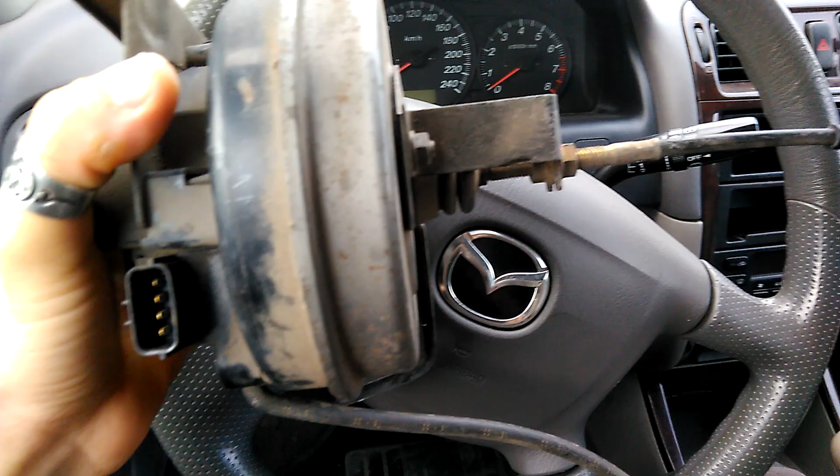Today we talk about installing cruise control on the Mazda. This particular Mazda has a 1.8 liter engine, 74 kilowatts. From what I've searched on the internet, there's no Mazda 1.8 liter FP motor with cruise control - that's just a non-existing configuration. Today I'm going to install one to see if it actually works. I haven't done this before, I don't know, we'll see in the process. It will be a lengthy video, so without further ado, let's go through what you need.

The first thing you need is reading the documentation. By reading it, you'll understand how things connect, what exact wires you need, and how to test them. That's very important. Prior to turning on the car and trying if the cruise control is working, you could test 99% of the cases.

So this is the documentation. I'm not sure I can give you a link to the file, but you see the file name here. I'm sure running it through Google will get you results.

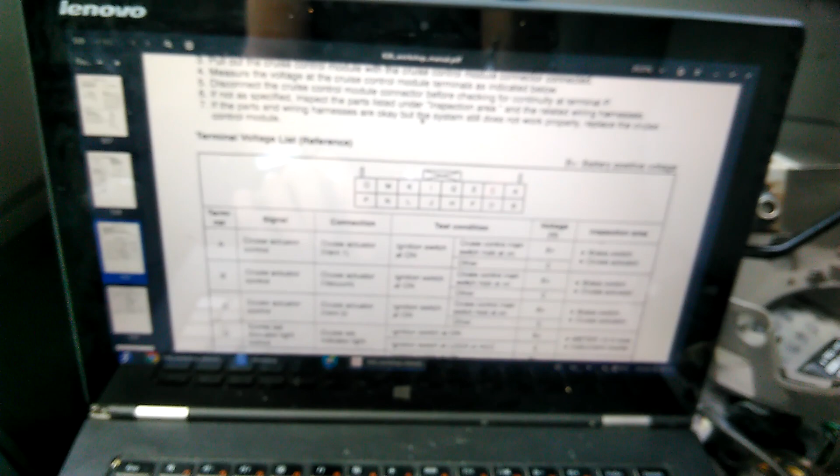So the documentation, this is for the pinout of the cruise control module, the brain of the thing. It shows where things connect for the loom, because most likely you will get the cable loom cut.

Here you can also find useful information when buying. Actually, maybe even here was it.

So when you get the actuator, if someone takes it down for you, you can measure the resistance between the pinouts to check if they are correct before buying.

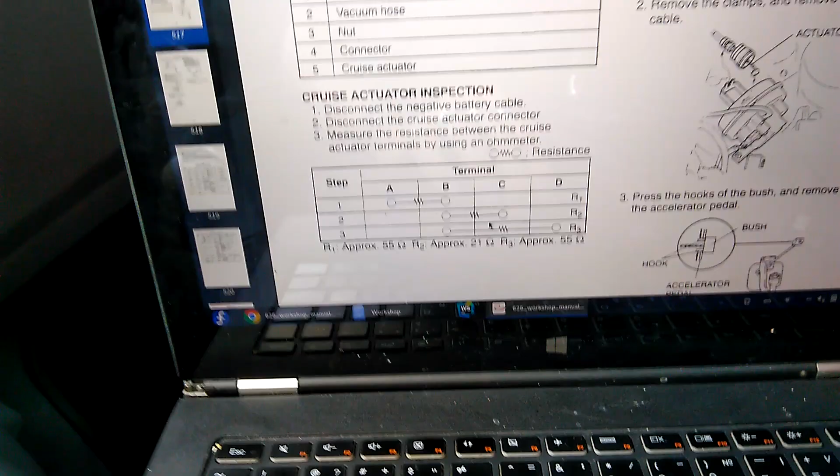Now on my actuator, I actually didn't prepare well. I just went and got everything, and I didn't check anything. On my actuator, between A and B, I actually get 50 ohm, not 55, while the other ones are pretty accurate, 21 and 55. So I'm hoping that's not actually a bad thing. We'll see.

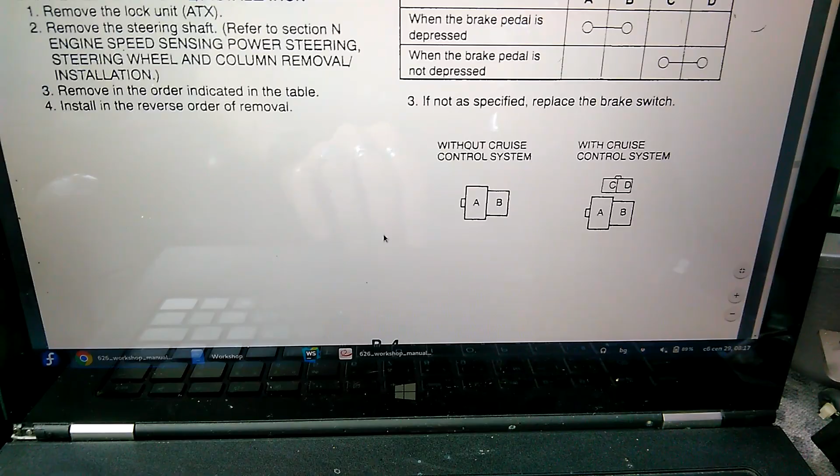The other thing you could check out, and it's very good to check, which in my case again didn't work, is the stop button. That's actually the most important part of the system, because it provides power. As I'm looking through the documentation, it actually provides power to the actuator. If you don't have this, it's not going to work for sure.

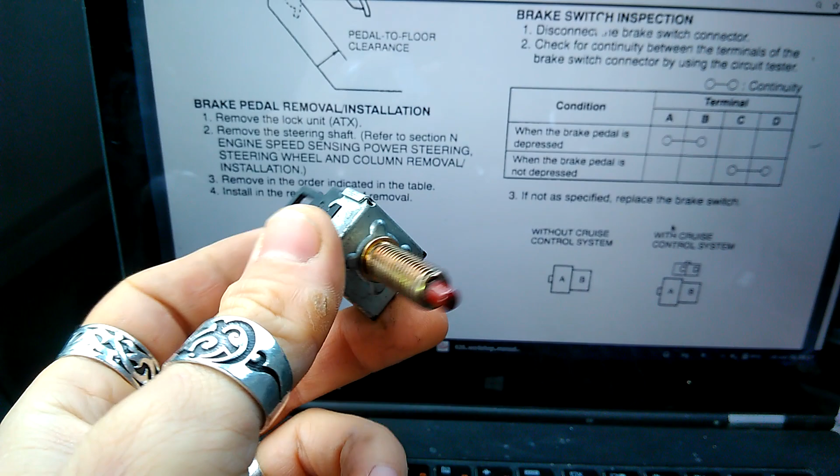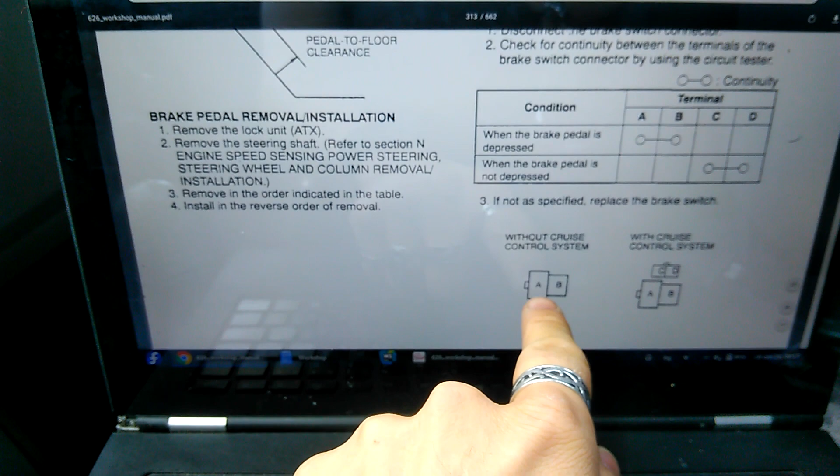At the beginning, when I started extracting parts, I looked under my feet here, under the steering wheel, and I saw that I have a button, but this is the button without the cruise control system. I did not know that they're different, so I gathered all the parts and went away, and a day later I figured out, well, I need this other part, so I had to ask the guy to send it to me.

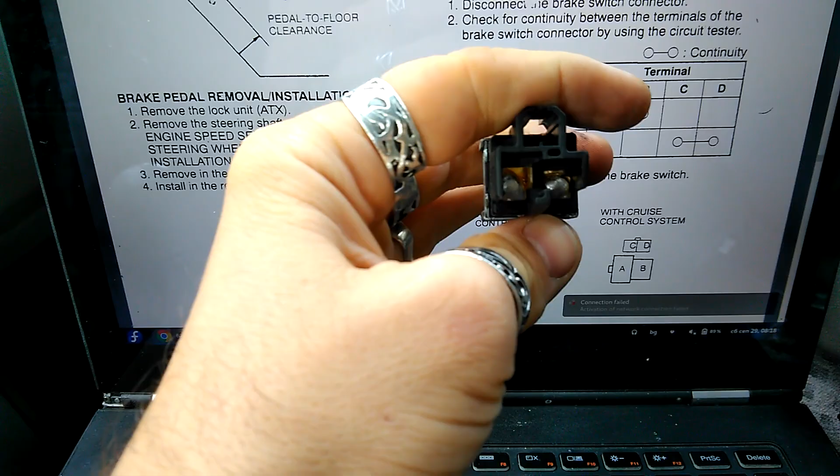I went and picked it up again, and after that, this morning, I did try the continuity test case here, and the C and D, the small one which is additional, the other contacts are exactly the same, but the C and D, there was no contact, so I had to open it.

That's why the label here should say BR70 - the other one doesn't have a BR70, so when buying, make sure this is BR70.

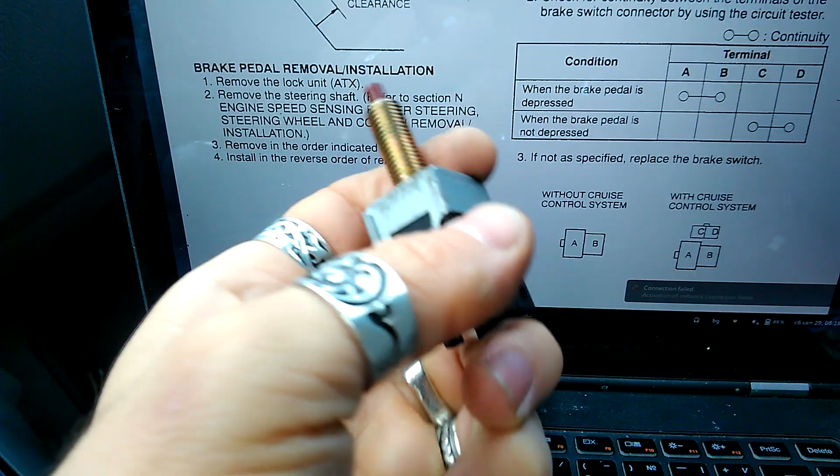I had to open it. You just pop this up and everything comes apart - it's just a switch, just contacts. Either they get dirty, oxidated, or wear out, but you can fix them. In this case, they were just dirty. I scratched on them, and now the button is working perfectly.

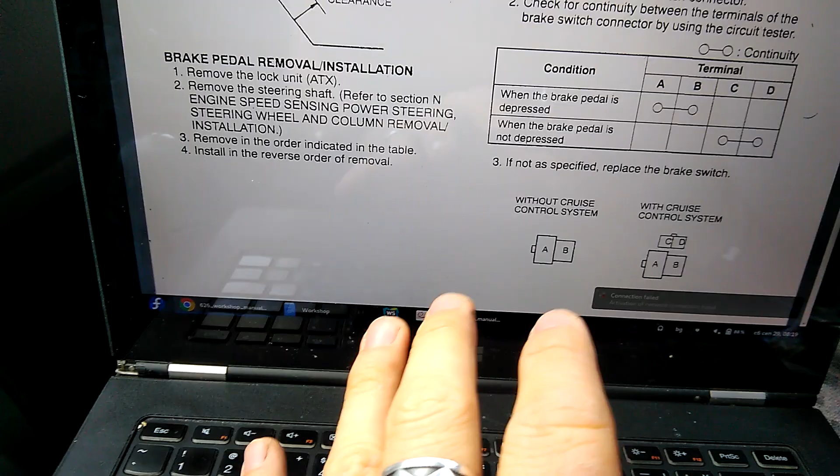Okay, so that's with the documentation - that's how you're going to test. There's even a mode in the documentation for how to enter a testing procedure. This will actually test and blink your cruise control, the green LED - it's actually a light bulb, not an LED. This way you can even test if the wiring for this thing works.

Okay, so enough with this. Let's go through the parts you need. Of course, that's the parts I think I need, but I'm almost sure it's all the parts that are needed.

Of course, the thing that I showed you - that's the cruise control actuator. It goes under the hood. It's pretty big. I have not only this, but with it I have all the mounting elements that are needed.

Then you need the switch, which I haven't tested. Maybe it's a good idea to test.

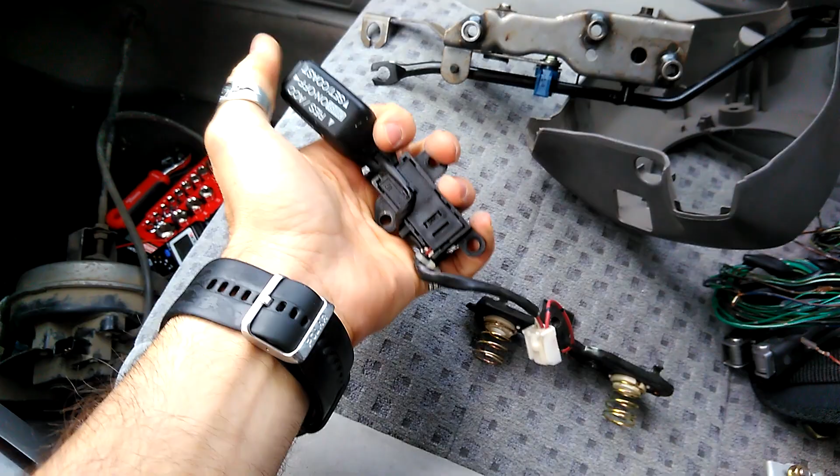There is in the documentation a way to test how it should actually appear when you click something.

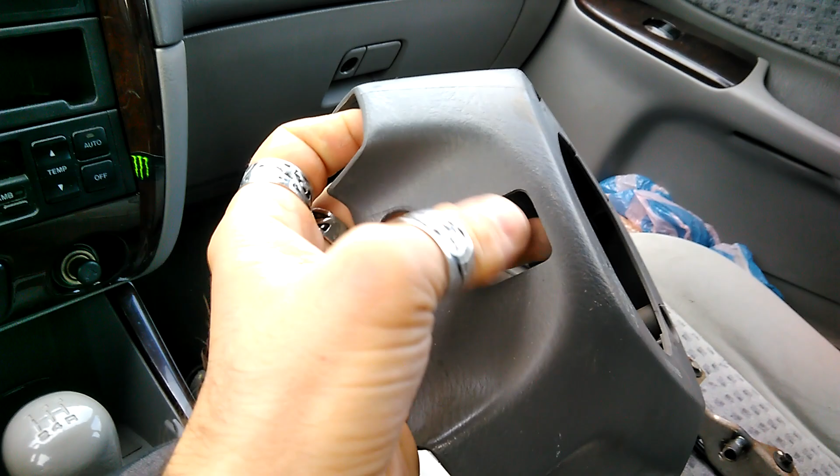This goes into you have to remove the airbag. There are two bolts here, and you remove the airbag. This goes there. For this one you also need this because of this hole here for the switch.

This one, in order to remove, you actually have to pull out the whole steering wheel. So it's good to mark exactly how it was, so when you place it back, it's straight. In this case it's not straight, but I'll mark it anyway, I don't care right now. I'll mark it, and when I place it back, it will be good. Because to remove this plastic here at the back, you actually have to remove the whole thing.

That's that. You need the gas pedal, because the normal gas pedal doesn't have this addition that, when pressed, actually presses your gas pedal. It only has these parts here, but doesn't have this whole thing. And this is where the actuator actually connects to.

Of course you need the brain. This is the brain box, it's positioned here. You need that brain box.

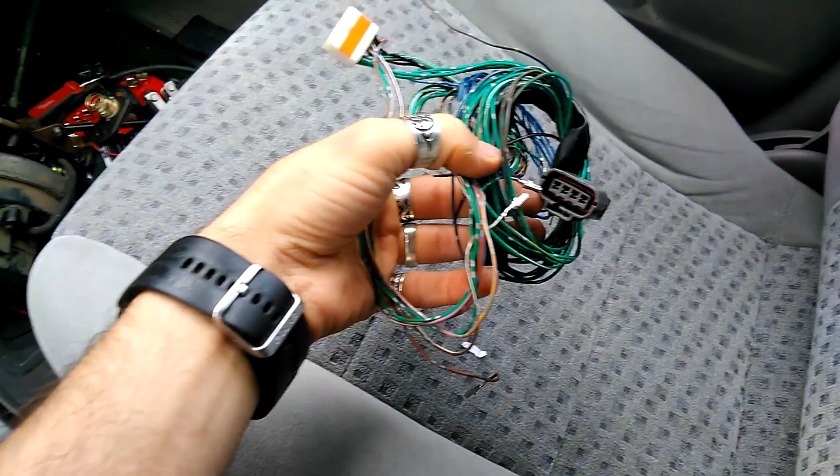I already mentioned this, this is just some tooling. And this is actually the most important part, we have to speak about it a bit more. This one is the most important, because you need to figure out where to connect what.

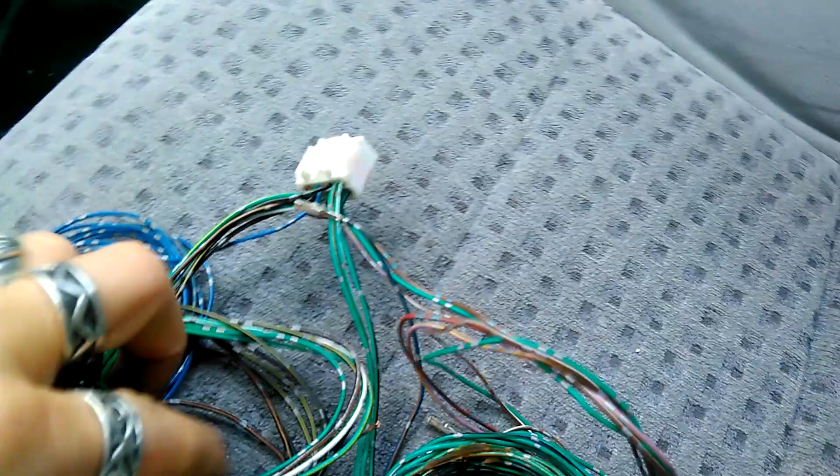If you are lucky enough, like me, to have the car there and disconnect it yourself, as you can see I have a few loops here, different loops for different combinations of stuff. I have the whole cable for the actuator without cutting. I have a few cables here, which I'll tell you about in a bit, which are with connectors. They will go directly here. There is a plug there, we'll talk about that in a bit.

I have a few cut cables. These are for different sensors that the car actually uses, and they're not exclusive like these for the cruise control. And this big wire is actually a test wire.

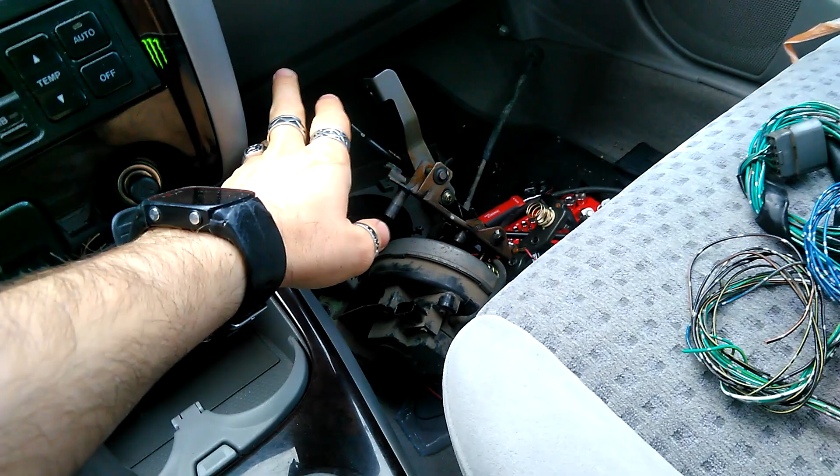This goes into the diagnostics plug under the bonnet. It's not mandatory, I guess, if you don't like it you can skip it. But it goes with these, I'll have to plug those somehow. This is the somehow plug-in, because there is your computer, your PCM or ECU or whatever you call it. Next to it, on top, there is a hole where the whole cable loom goes through.

When we took it apart with the guy who actually owned the car with the cruise control, we thought we'd just pull the cables through this hole. Well, it doesn't work like that. Not only is there rubber, but there is actually a molding. You can see some molding left on the wires. There is a molding for the whole loom, which is that thick, and everything is molded into one big chunk, so no water goes in, because it's right next to your computer. If water goes there, bad things happen. So taking these cables out will be a challenge. We'll see how that goes.

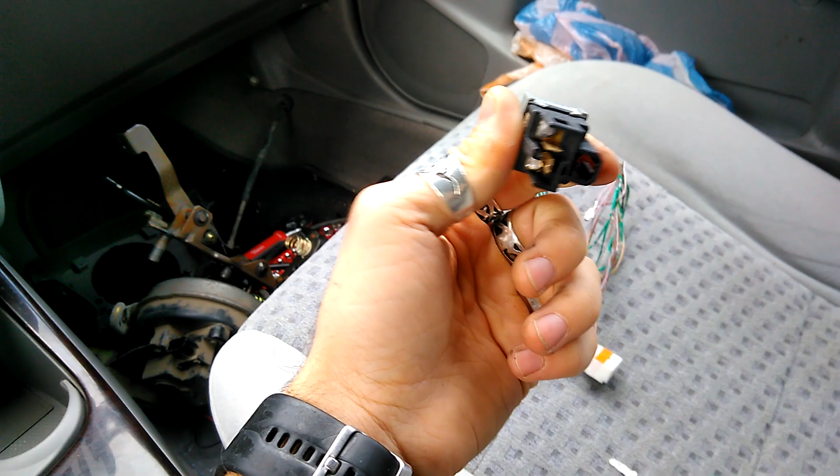So that's actually the second step I'm going to do. The first step in this operation is installing the brake switch, not because it's the easiest thing to do, but because of how you test things. When you install it, all the test procedures are related to this thing, you have to press it and depress it. The second step is to install this thing, because the test procedures require those two things to be installed, so you press stuff and see how the control box reacts, or what things come into this pinout.

So if I'm installing the switch, I also have to install the cover. These things I install first, and for them I'm going to talk about a few things here and now. Let's first start with the brake switch and the steering wheel switch.

Those two switches, apparently, when I first read about them on the internet, I actually found only one guy on drive2.ru, I believe it was called. He had good pictures, he had the cabling of those two already in place. I checked, and well, it's the same here.

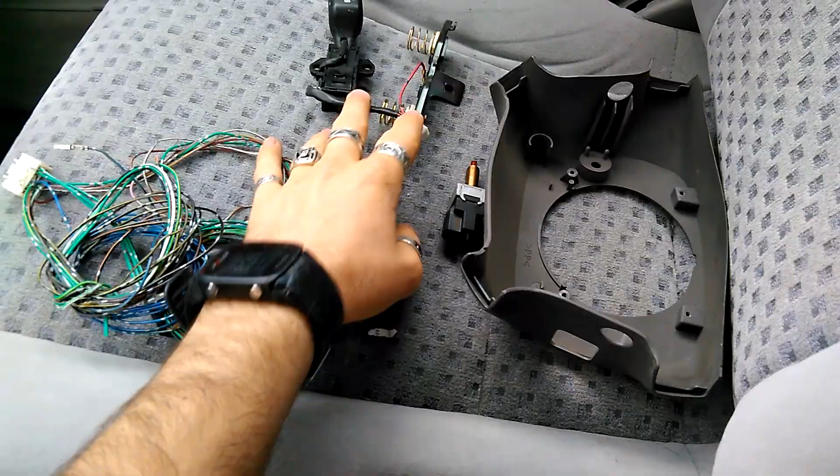So I don't know if you're going to see something. Let me go out. Okay, I'm not sure if it's visible. Let me turn on some flashlight. Interesting, it doesn't allow me to. Damn it.

But here, where is the stop switch? Let me orient myself. You should have an additional loom. Actually, here it is, I don't know if you can see it. This one, that's a connector which is just floating here. There's nothing to it, and that's the connector that should go to the stop switch, the new stop switch. So that's the cable looming for this one, already installed in the car.

Same goes here. I've removed this to check, of course, when I was getting the cruise control.

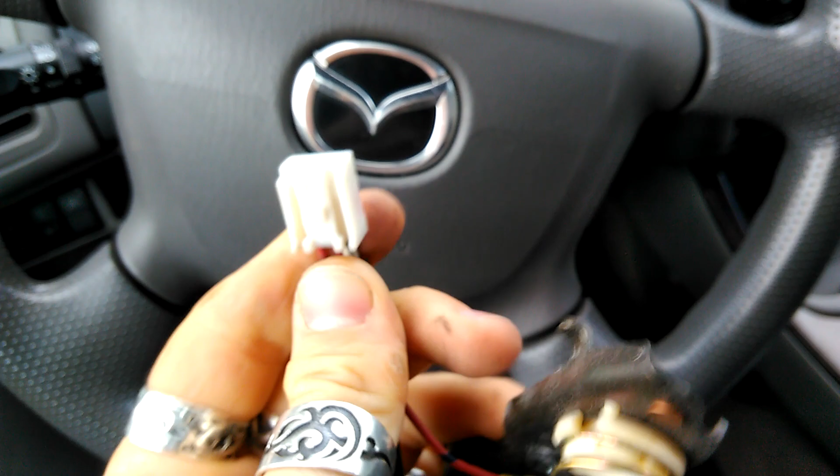The plug, as you see it, has all the wires. The plug that's in here actually has only the grounding wire, but the female plug on the other side of the wheel has all the wires. So all the wiring is in place, which you can also see here, where I'm going to plug in all those connectors. You can see that on one side they're empty, but on the other side there are actually wires.

So these wires are actually the brake switch, the steering wheel controls, and the lighting for the instrument cluster. Now this one, as I said, we have to talk about a bit.

As you can see, let me check. This is the third one here. Let me focus - the third one is missing, and I believe on the other side there's also one missing, the fourth one from right to left. So we have two missing wires.

Going through it, I don't know, I should have probably shown you through the documentation which wires exactly are missing. Which leads me to the note I have to give you.

The cruise control you have to get from the same car, like facelift or no facelift, and automatic or non-automatic, because one of the cables missing here is for OD, which is for the automatic transmissions.

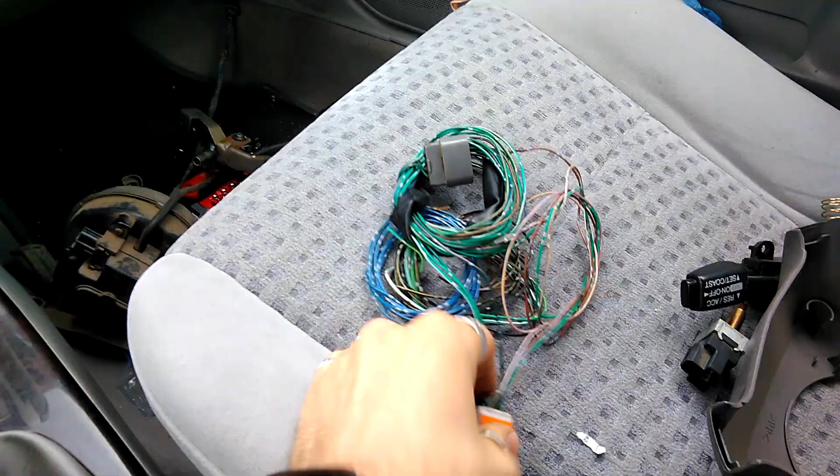This is automatic shifting, this is actually a manual shifting mechanism. So I don't care about OD, and apparently the control box doesn't understand it. I don't know - I checked how many such control boxes are installed, and there are like 3 in the non-facelift version.

And the facelift version I don't remember. So there are few of those that are actually being installed, and probably this one won't understand automatic shifting. The other one that's missing is more related to being facelift or non-facelift.

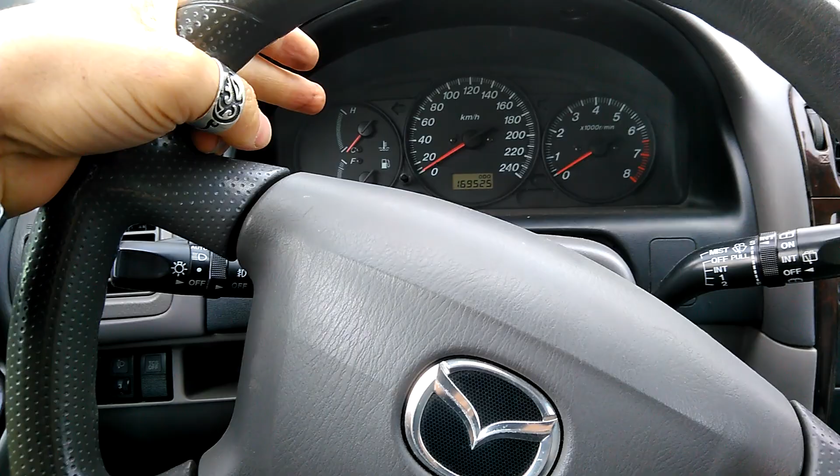The other one that's missing is the indicator, cruise main indicator. On the pre-facelifts, they're actually like on the Mazda 6. Here you have a cruise main, which is a yellow bulb that's lit, and then you have a green bulb which lights up when you are actually cruising.

The facelift version of the 626 doesn't have the cruise main, while the pre-facelift has it. So this wire here is missing for the cruise main, and there's no wiring there - there's just no such wire. So if you're getting a facelift version converted to non-facelift, you're probably going to miss out on this wiring.

And I'm hoping that's the only thing you're going to miss, because you need the vehicle speed sensor, and I'm not quite sure where the pre-facelift version gets the signal from. The facelift version actually gets it from the ABS.

Which, as a test procedure, I'm going to show you probably later today how you test it. It's actually written, of course, in the documentation - I'm not making it up.

Okay, so I think that pretty much covers what you need. And now I'm going to start installing. Since I'm the only guy, I'm going to pause the video, install the thing, then show you, then pause, then install, and so on. So, later.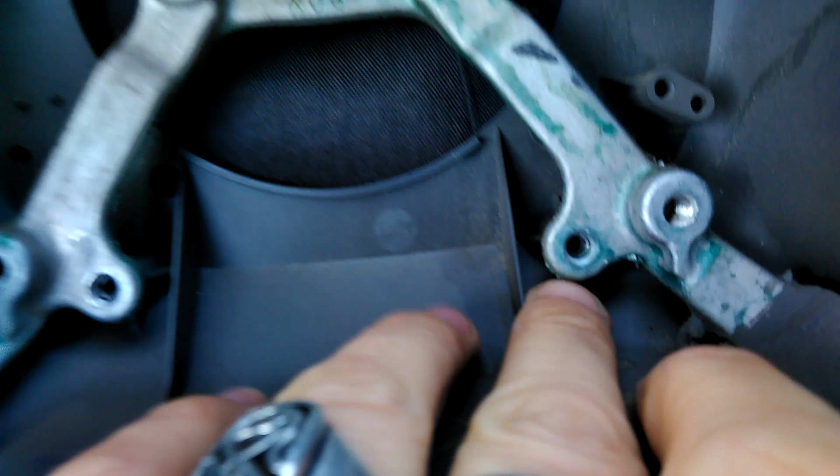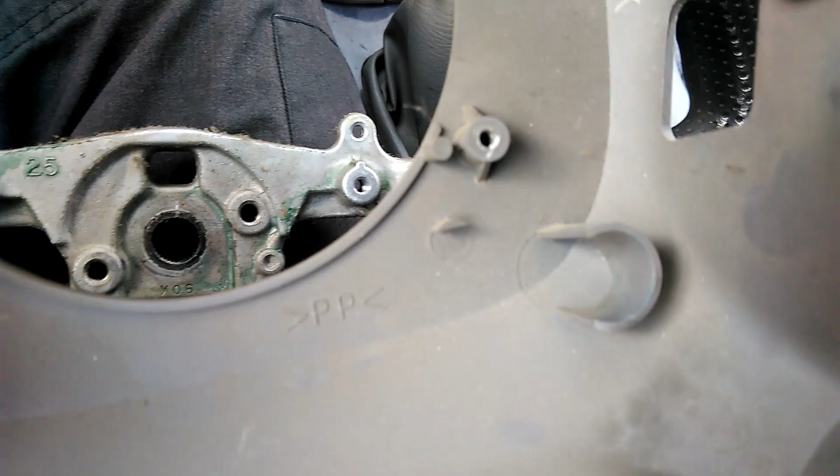Okay, first, because if you get the old part - okay, the old part, as you can see, the holes here match the holes where you get the plastic off. These holes here, they are shifted and on different places. Now here, as you can see, it's different. That's reason number one - those do not fit.

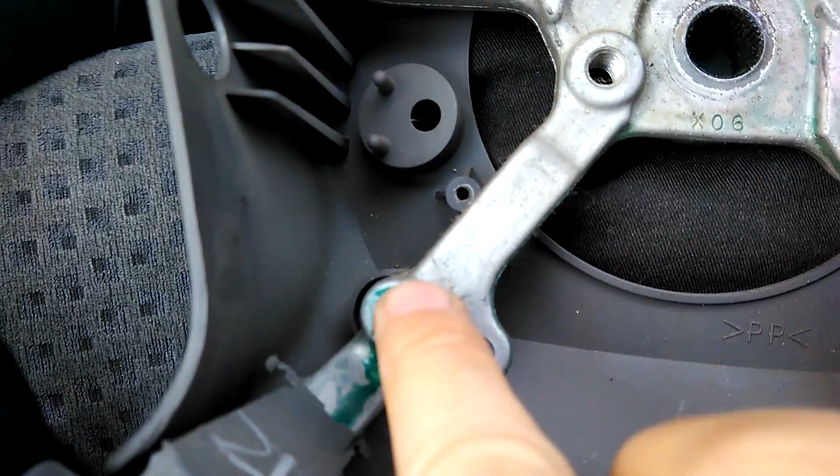I'll make those fit. As you can see, they're in totally different places. I'll make metal plates and make it fit, since this isn't heavy and doesn't need to be that tight.

Reason number two is more problematic though. This one has a mounting mechanism also - 3 bolts, 3 screws, and when you place it inside, they are probably supposed to go onto the plastic, I don't know. So this probably has to be like that, and now it's in the way.

I'll have to figure out a way to secure this in this current setup. I do not want to get the steering wheel from the other car because it was in an awful condition - that's the first thing. Second, I would actually install a Mazda 6 steering wheel and get rid of this whole problem. So I'll do a temporary solution here just to see the cruise control working, and the next step is to get a Mazda 6 steering wheel. That's it.

Okay, so apparently the whole thing is garbage - you can't fit the airbag on now because you have too much wires, and probably that's why the metal frame inside the other steering wheel is different, so the cabling fits properly. That's my guess. I'm going to invest more time fixing this after I see the cruise control is working, since this whole thing is an experiment. So let's continue with the stop brake and see if we hit any issues there.

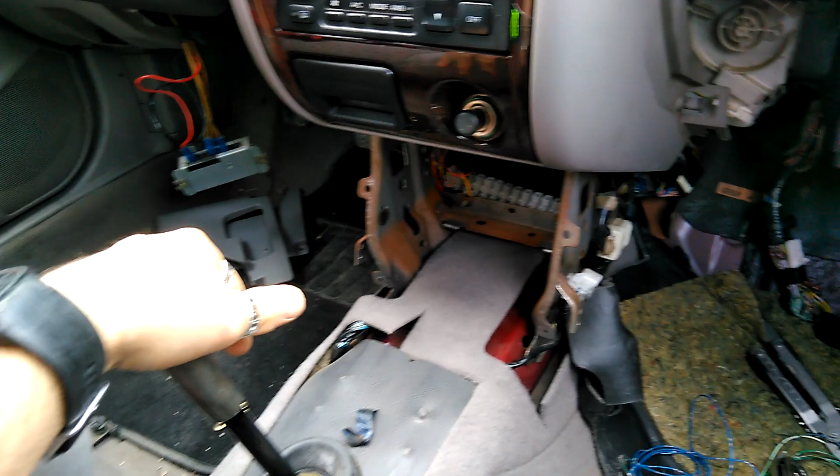Okay guys, so I mounted the stop switch, no problems there. Next thing is to actually connect this without pulling the cable through, so I can test it here inside the car.

Battery is currently removed. I removed the ECU, as you can see - if you haven't removed it, let me grab it. Yes, a good idea is to actually remove the seat here, it will be much more comfortable.

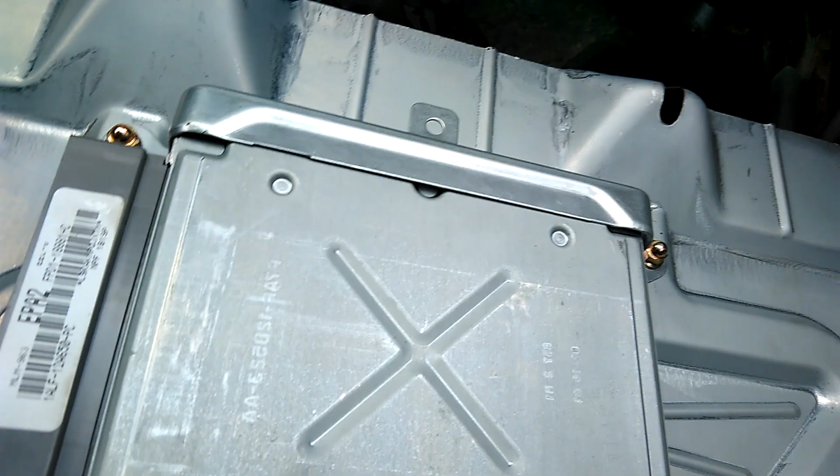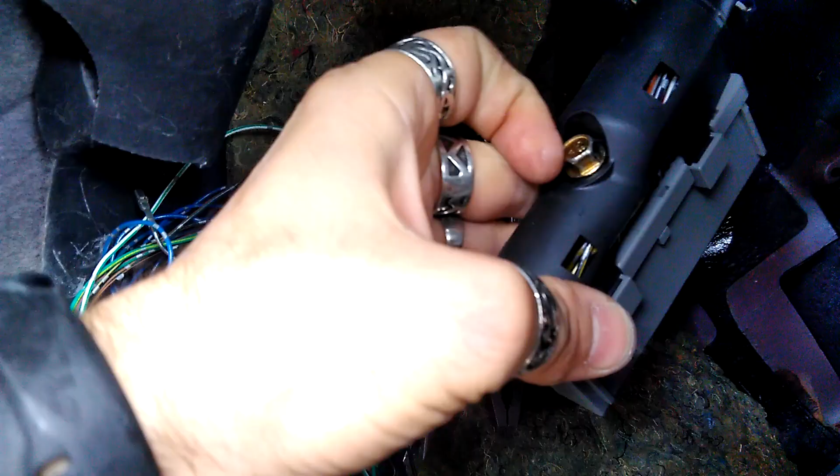This is how it looks, it's sitting like that. When you unbolt 4 bolts - this one, this one, this one, and this one - you can't just simply take it out, but you can pop it from this side, so this connector sits like that. Use a screwdriver to unscrew this, remove the connector, and that's the main thing which we do not need.

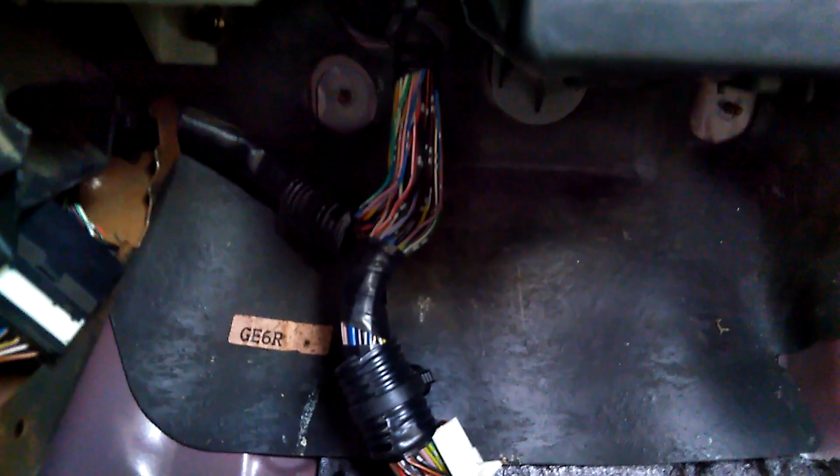So back to the pile of car parts there - this we do not need. What I did is... by the way, if you haven't read the Kama Sutra, it's probably a good idea to do it, you're gonna need it for this. Okay, give me some more light.

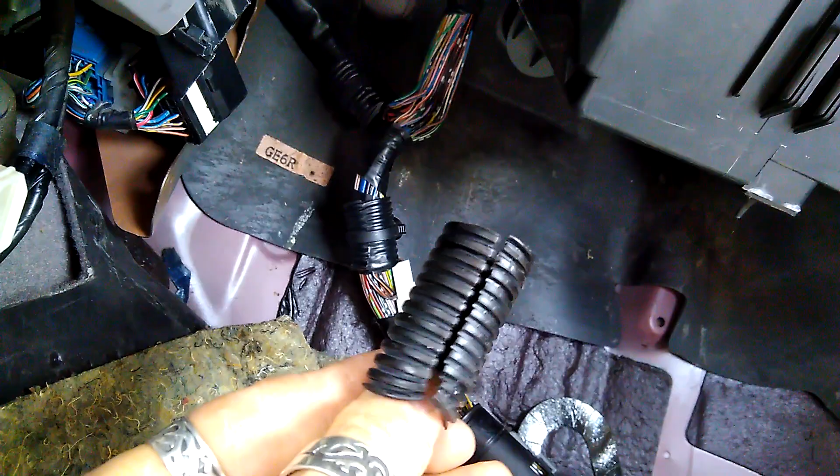So this one here goes to the bonnet in front, and here there was some sealing which I cut. It's actually plastic that's already cut in the middle, but it also has lots of electrical tape on it and below it. So all the cables were in electrical tape, then this, then electrical tape again - lots of cutting. But this is where both signals to the computer and to the instrument cluster go, right in the middle. That's the perfect spot to actually cut the wires and connect our cruise control module connector.

The other thing is, you need to remove the outer connector of the two. You could try from here to take the whole white thing, but I couldn't do it - there are two shitty things on the bottom that prevent you. Anyhow, you can see from this side of the connector, on this first row, there's only one missing spot for a cable. If you look at the other side though, there's actually many missing spots - that's the thing we need, that's where we are actually going to plug in our connectors.

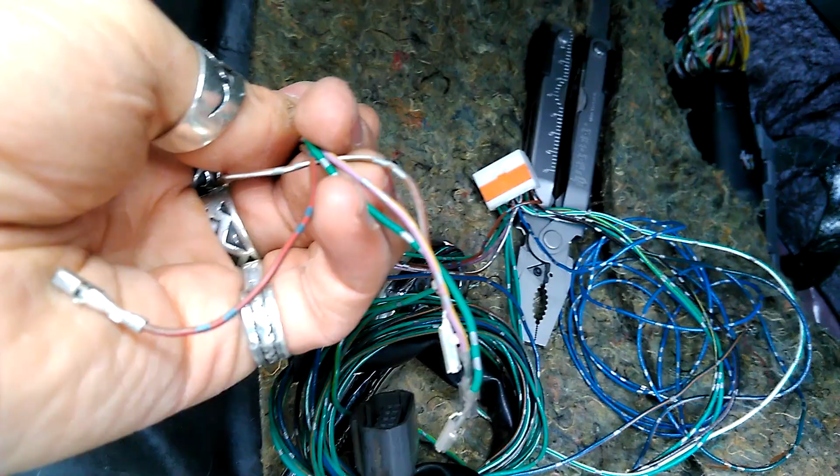That I have here with plugs, and actually the colors even match exactly. So if you look at this side, you can see there is a brown one, then there's some brown with white I believe, then some purple with yellow, a blue with orange I think, and this one, the green cable.

Now a side note here: if you see my connectors, I have only 4 of those, and I actually told you 5. The other one is a blue one, so the blue one actually goes into the pile - this is the power for the actuator, and initially I had it here. I didn't know that this was the last thing that I actually took from the car. First I cut everything that seemed not to go to this connector.

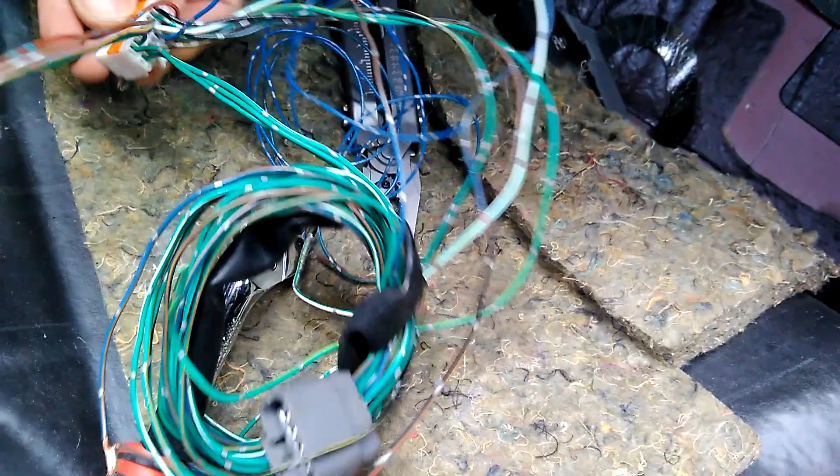Which meant I actually - let me find it with this mess of cables. Yes, here it is, this is the cable that actually - after that I got us... I got downloaded, like uninstalled, like I'm a programmer and not a car genius, so my terms are a bit programmer-ish. So this is where it used to be, I cut it, so this one will actually go also as a 5th cable here.

Now for the pre-facelift version there should be 6 cables, and one should be for the instrument cluster main bulb, cruise main, I guess. As for the rest of the cables, since the colors match, all of these that I need to cut I actually left a lot longer. I'm just going to find the spots, install them, and then when I get to the test procedure, I'm gonna see if I connected to the proper cables. If not, the documentation says where they should connect - it's just easier if I follow the color of the cables, since apparently they match.

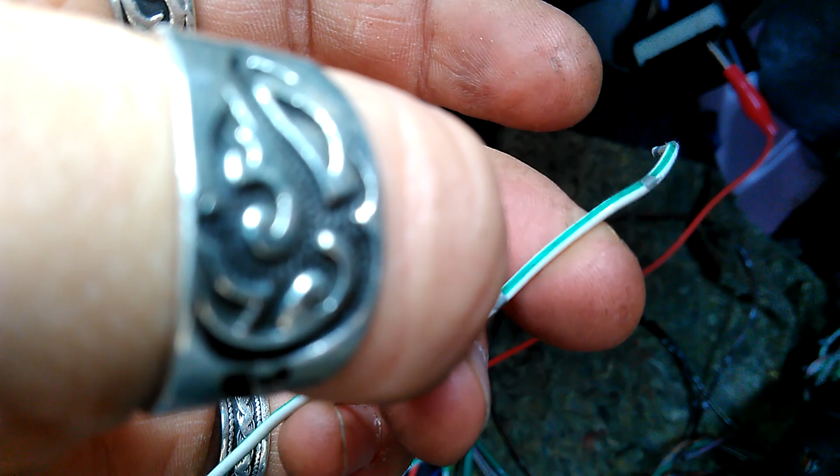Side note here: when connecting cables, keep in mind that you might have two cables with the same color labeling but different stripes. The one I have to connect is white with green and a single silver strip. Looking at the loom, I traced it - that's the clutch switch. If you look closely, there are two such wires: one is white with green but has two stripes, and this one is white with green with only one stripe. That's the one we want, not the other one. So keep that in mind if you're going by color, because you might get it wrong.

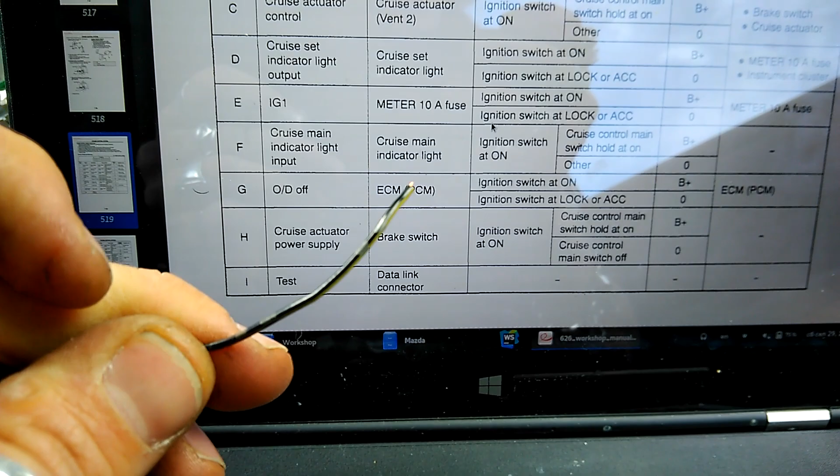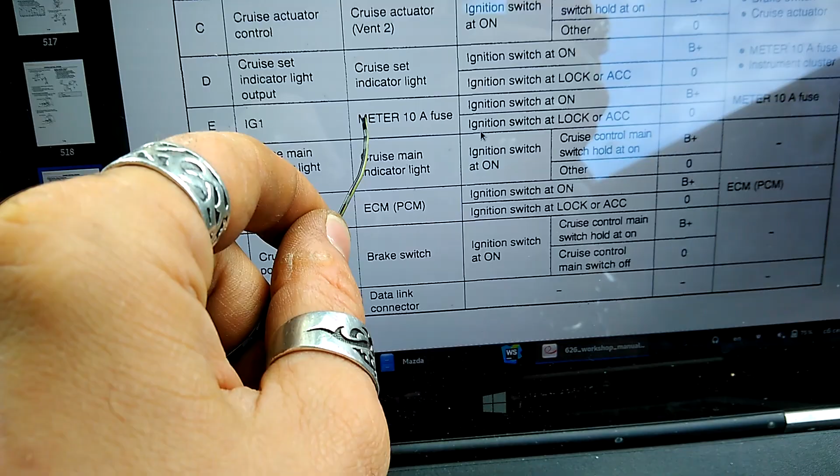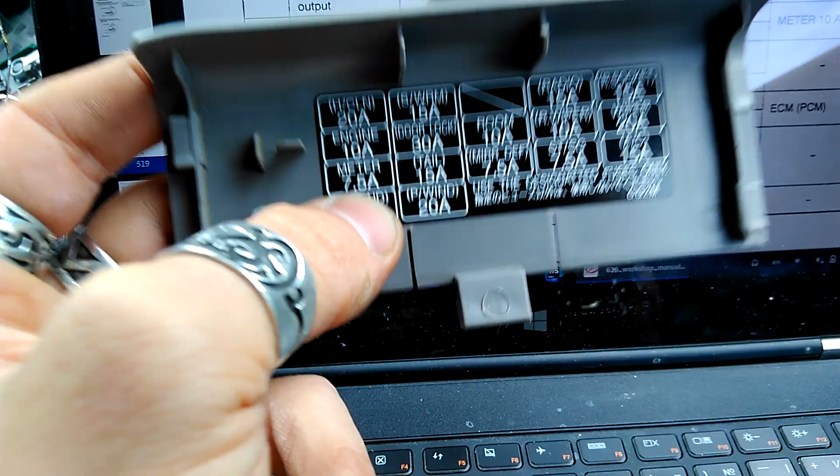One thing I noticed while checking this black with yellow cable - according to the documentation it's for the ignition and goes to the meter fuse, which I checked and it's correct. What I noticed though is the documentation says meter 10 amperes fuse, but here it's 7.5 amperes fuse installed. I guess since the power of the cruise control module goes through the meter, I probably need to increase it to 10 amperes, otherwise it might burn out. I'm not going to try it with the 7.5, I'm going to search if I have a 10. I'll plug it in just to make sure it's as per the documentation, 10 amp fuse. I'll ask the guy I got the cruise control from to take a picture just to confirm it says 10 amp.

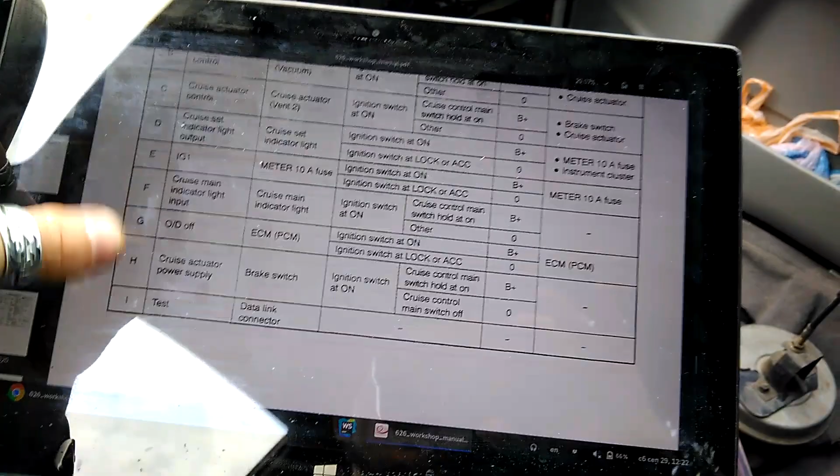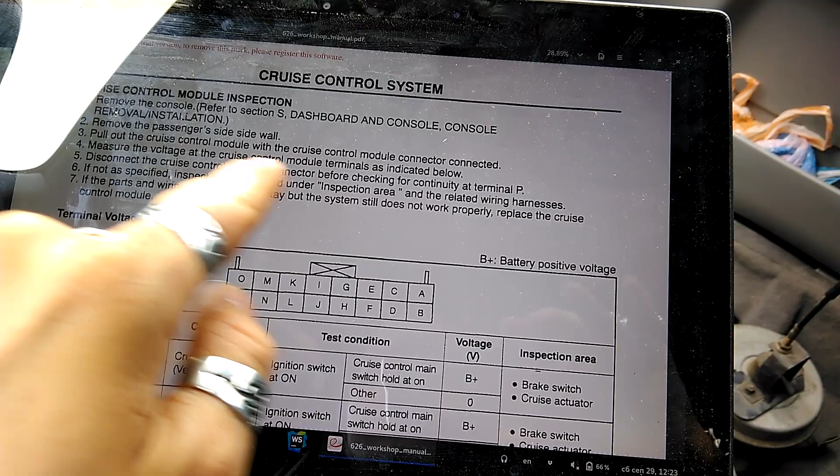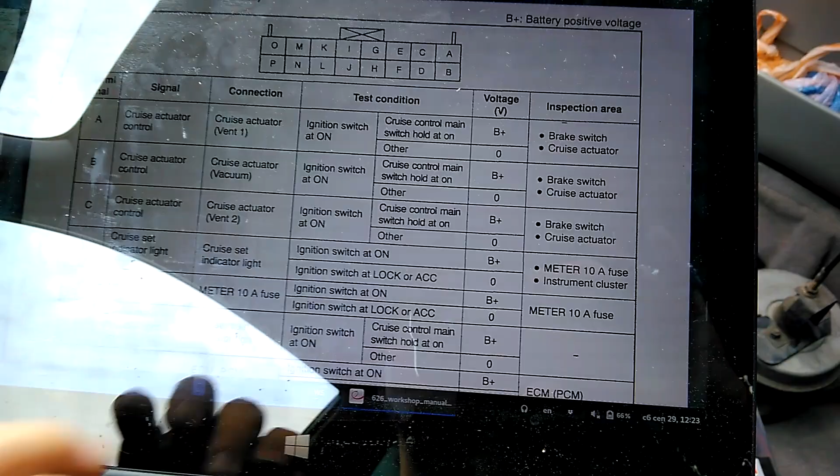Okay, that's the whole thing. I connected all the wires and ran through the whole procedure testing each wire. Everything checks out properly. As it says on top, if the parts and wiring harness are okay but the system still does not work properly, replace the cruise control module - and it says with the cruise control module connector connected. So you test all these except terminal P while the cruise control is connected. This gives me the idea that the cruise control module should be working properly, because it outputs the proper signals for the actuator. These actuator signals are all good, so it reads properly and outputs correctly. I guess I should say this is done, this is fine.

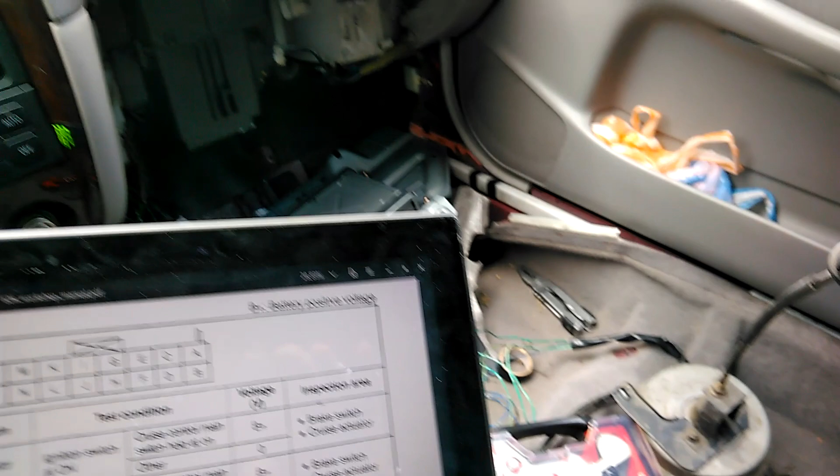So the next thing I need to do is actually pull the wires from there somehow - that's the hardest part - towards the bonnet, before installing the cruise control actuator, because it will be in the way otherwise.

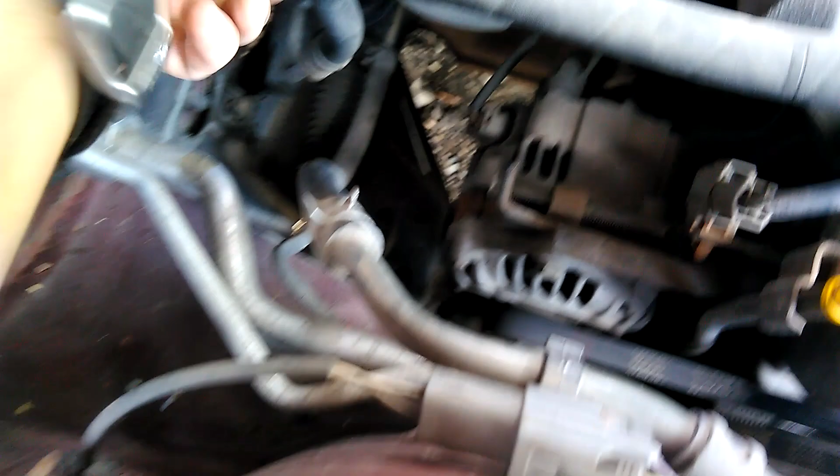Pushing the cables through, that's a tough operation. What I did is I pushed the whole cable loom here to the outside - you can see the hole here. I push it from outside where it's a lot easier to work and see. This is the cable loom, this is the mold I was talking about - it's all molded, these cables are not moving. So what I did is I used these parts of wipers, which I'll pull wires through, pulling them around the rubber. This goes on the other side - stick a cable here, pull. That's the way, I need to do that five times.

Of course, first I will need to figure out how to remove those wires from here without cutting them, because I do not want to cut them, but there should be a way. There is always a way.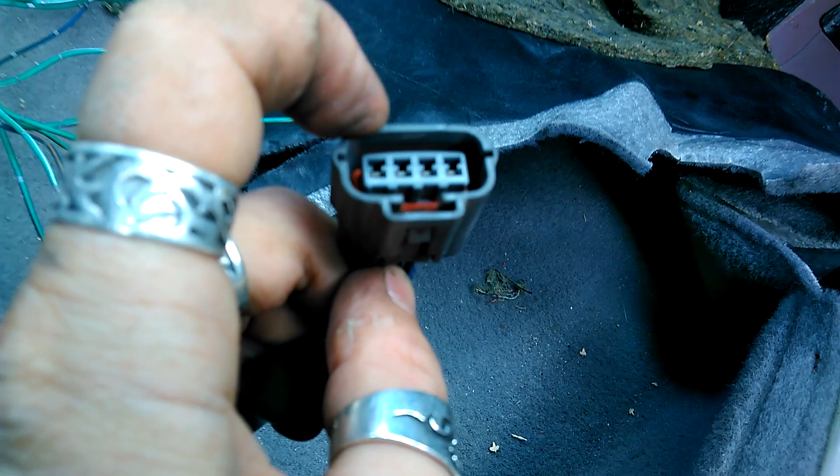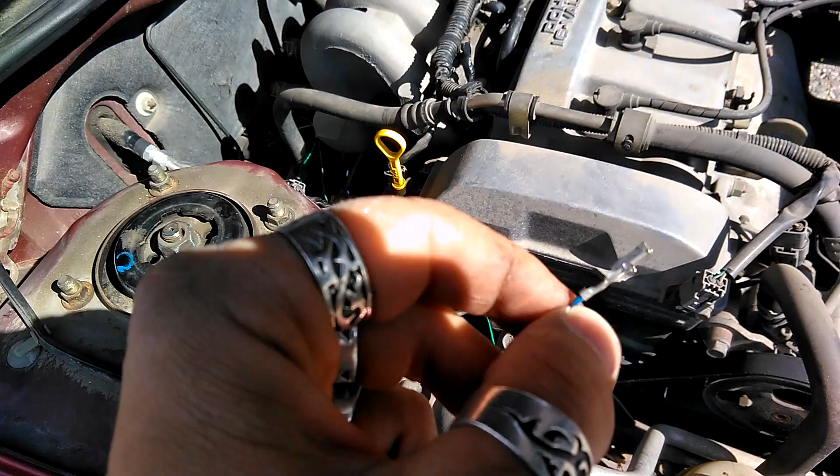Okay, so I have the loom properly installed back, and I have all five cables I need here, plus the testing cable for diagnostics. That is it, it's all good. Now what I need to do is secure those from heat, route them all the way there, and then install the actuator.

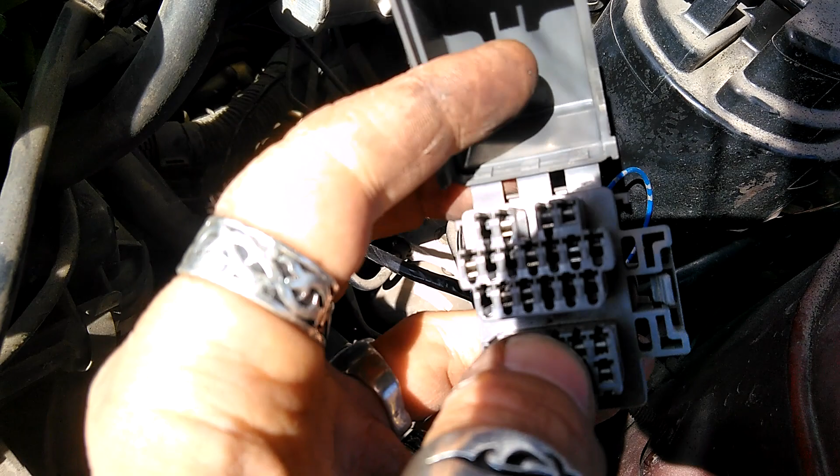Quick note for the test wire - the testing wire, on the car I got it from, has to be right here at the bottom. I don't know if you can see, the sun is shining. At the top you have a pin, I believe that's battery or something on the diagnostics port, and the topmost one on the right below it is where you insert the test wire. I'm going to close it, connect, and that will finish the electrical part of the installation. The only thing left is the actuator and the gas pedal.

Okay, now I'm up at home and I just fixed the issue with the airbag not coming in. Now as you can see, it actually fits perfectly.

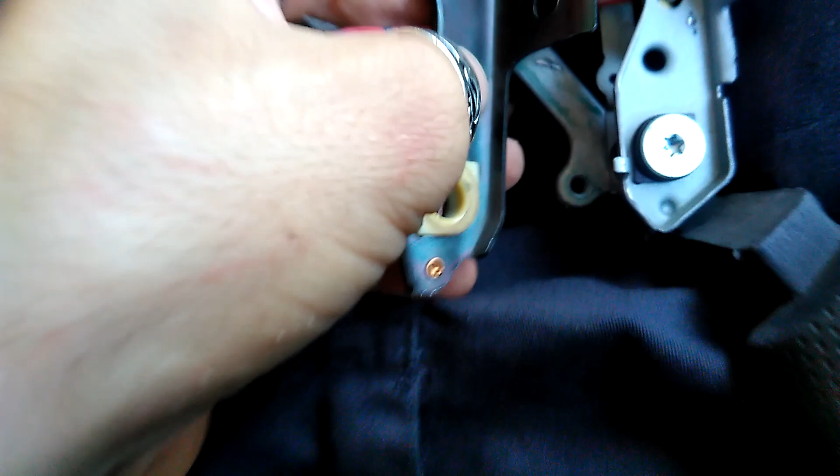The issue is, this is what I get with the cruise control, this black metal-y thingy. Apparently it's a bit different in shape, and also has different stuff. Like this one here, it has it, but on the other side it does not. And also the angle here is different. It's just a different structure.

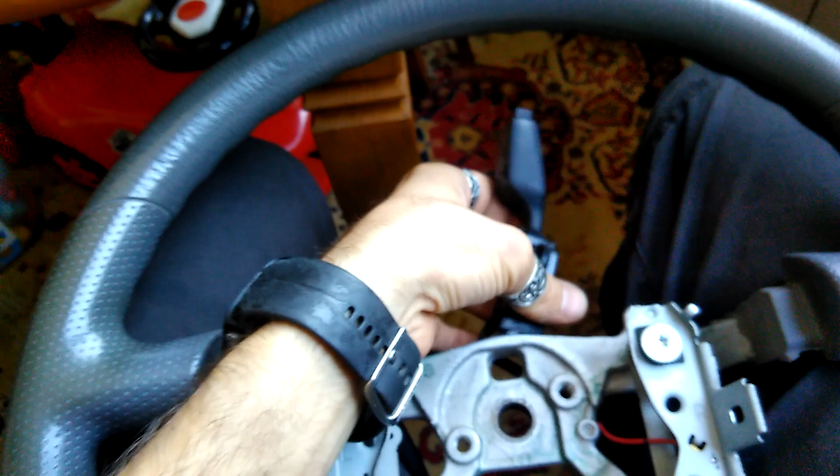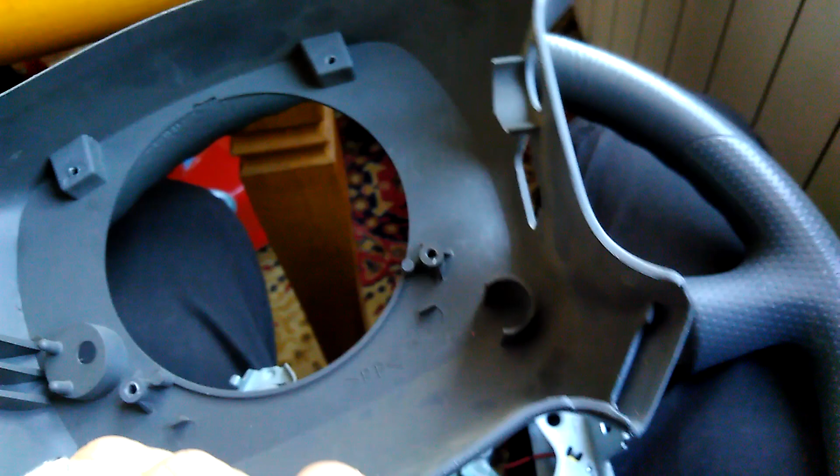Steering wheel. So what I did is actually I unplugged it from the plug. That's the plug, and I plugged mine, the original one. So I have still this, but the horn is working. That's the horn, and the airbag actually goes in nicely. Now the next thing to figure out is how to fixate this one so it doesn't wobble inside of the steering wheel. Actually, how to make the plastic not wobble also, because currently I cannot fix it to this.

Okay, I got a dirty fix for the wobbling plastic. It's extremely dirty. I use cable ties. I'll cut them in a bit. That's how it looks, and it's not wobbling at all. It's actually pretty solid.

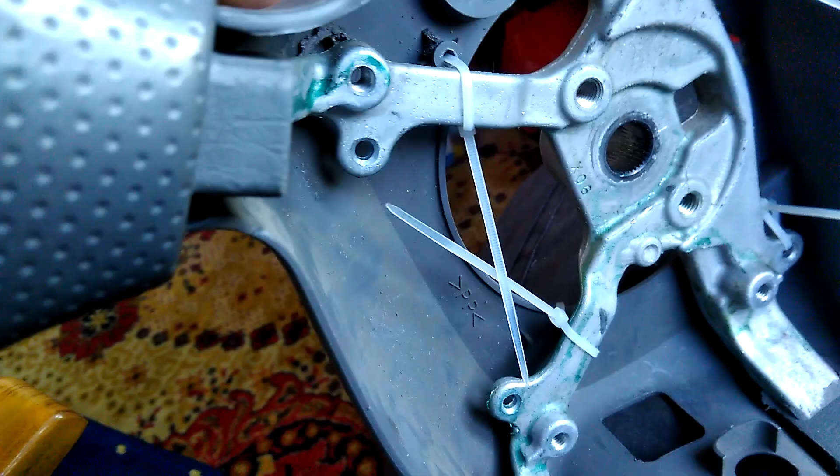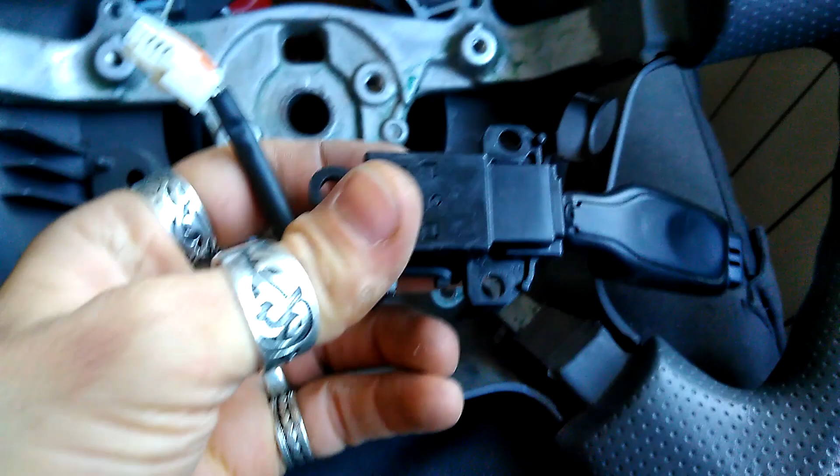The other thing that I had to do is cut. There were two plastic pieces. You can see where it's cut here at the bottom. I used a Dremel to cut it here, and this one here also. So these were in the way for this to actually hit the bottom. Now it's at the bottom, and I use the cable ties to make sure it stays there. I'm planning to use the same for this one. It's a temporary solution which will hold until I find my Mazda 6 wheel.

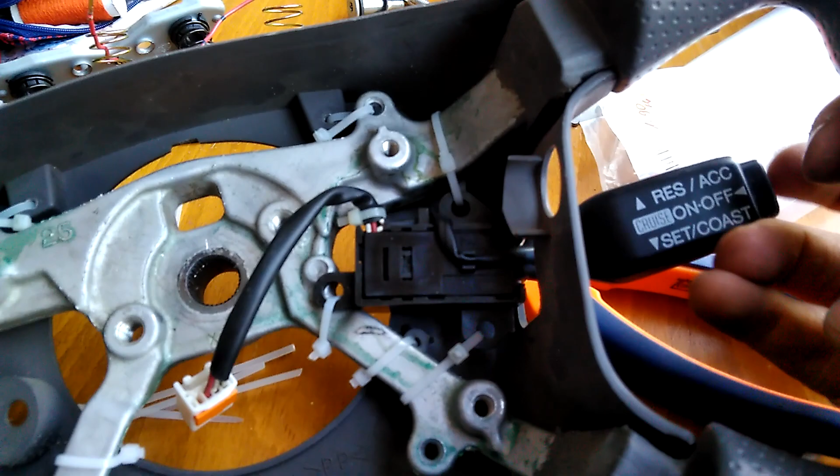Okay, and here's the fix for the switch. It's pretty stable. It's a temporary solution, as I said. Actually hitting it works. The only position that doesn't work properly is the cancel position, which you have to pull and press in, otherwise it's not working. But those two are working, which I plan on actually using. Everything seems good.

Okay, so I've been driving for a while now with the cruise control. All I can say, it's working perfectly. It's a working procedure. It's a bit different than what I thought and what I expected from the Mazda 6, since I know the one from the 6.

The one in Mazda 6 works by pressing buttons here, or on the other side, I don't know which one. By pressing the increase and decrease in speed, you press once and it increases the speed by some amount, I don't know, 1.5 kilometers or 3 kilometers, I have no idea.

When actually doing it here, by pressing up or down, it's not going to work like that. You have to actually hold it. So you keep holding it until you reach the desired speed, and then you release it. That's the way it works here. There's no other way to do it.

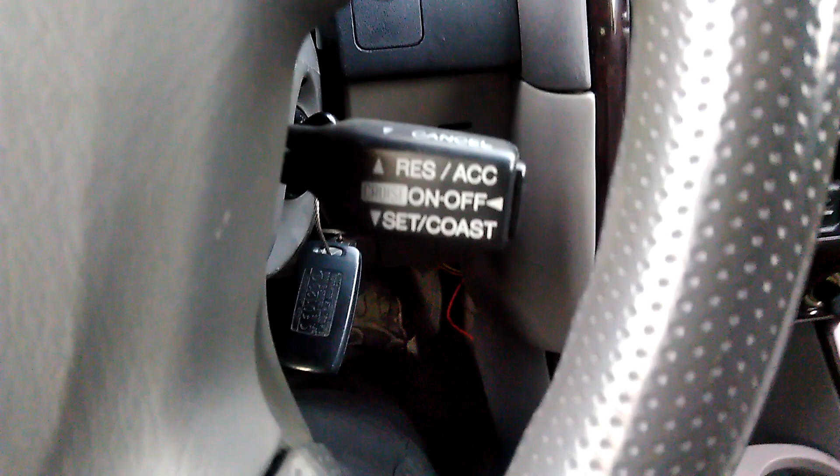Another interesting thing you might need to know is the difference between the Mazda 6 and the 626: this here actually has a constant press, while in the Mazda 6 it's again a button, much like these here. Now this means if you want to install a steering wheel from Mazda 6, you're going to end up constantly being on. You're going to wire it so this is constantly on, and that has one downside, as when you press on and off there is a relay inside of the module that gets turned on.

I'm gonna try to show you with sound. I don't know if you hear it, but there is a relay there when you click. So if you're constantly on, this means you're gonna actually have some relay constantly running. I don't know what's the damage of that, but that's what actually is going to happen.